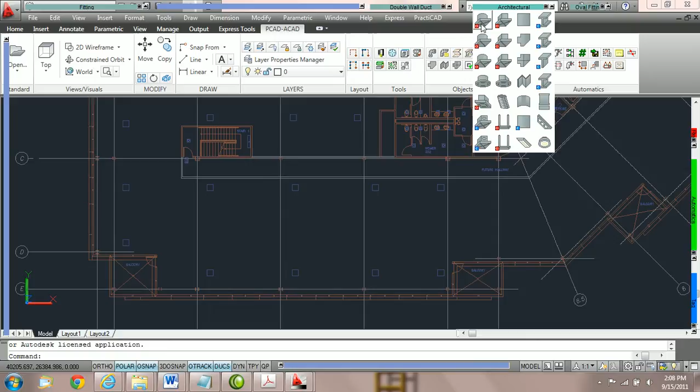We can go over to the parameter box, and right here, if you don't already have an airflow, let's give it a CFM of 200 and a model number ABC-123. We're going to say location room 1. And here you can also give it any special instructions, and you can also associate any accessories you have created for this grill as well. For right now, we're just going to type in the airflow, model number, and location.

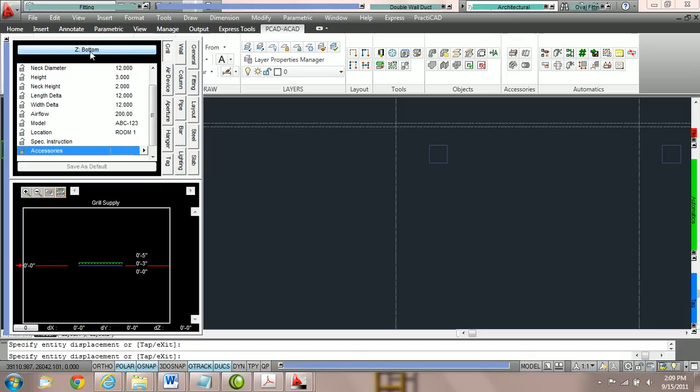Now, what we're going to do next is place the grill on the drawing first. And let's explain why. Inside PractiCAD currently, the hold positions we have are top, center, and bottom. Which means that when we look at our crosshairs, you can see that our crosshairs are actually holding the center of this grill. There are two ways to hold this grill by the corner. Either A, we can place it on the drawing first and copy it, which I believe is the preferred method. Or we could use our DX, DY, and DZ offset keys.

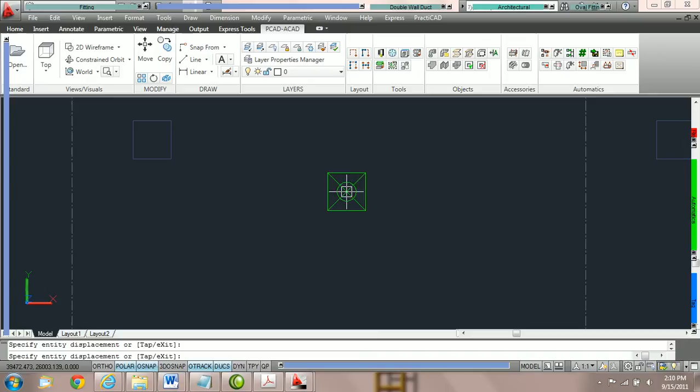For example, we know that the grill is 24 inches in face, so if we said offset X12, tab, Y12, which is half the distance, you can see I'm now holding the corner point. And there are tutorials on the DX, DY, DZ. But we're going to focus on what I believe is the easiest way to place down grills. I'm going to reset this DX, DY, DZ feature to 0, and now we're just going to place this down on the drawing at the height we want to place it.

So let's put the bottom of this grill at 10-foot bottom and hit enter. Then place it on your drawing. I click once, it's asking for a rotation. I click again, and now it's placed. Once you've got one on the drawing, click on it. You'll notice that PractiCAD's providing you with corner nodes, with which we can move and copy this grill.

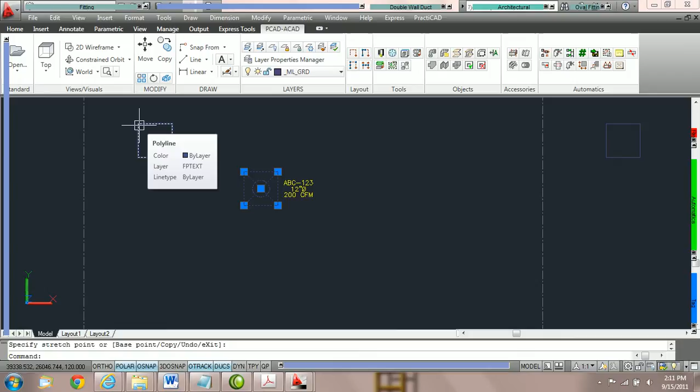But one thing we must be very careful about is we are going to take this grill and snap it to the background that was given to us by the engineer. And this background happens to have an elevation of 0, 0. You'll notice if you click on your grill that the elevation should be at bottom 10 foot. So if we don't use our Replace Z option, and there's tutorials on Replace Z, we're going to move and snap this to the background, and it's going to negate the elevation of 10 foot we have. So go into your automatic bin and click your Replace Z on automatic.

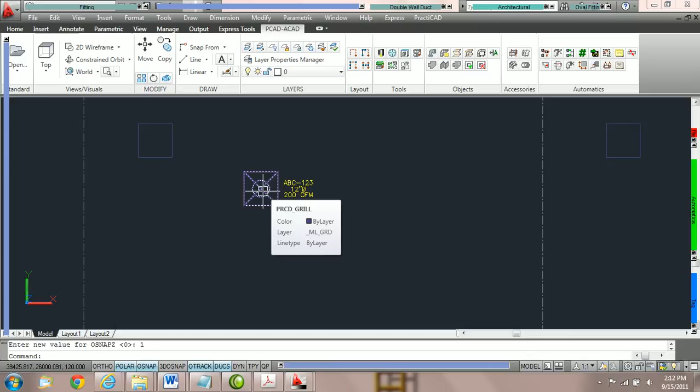If you're using AutoCAD MEP, you should have an icon for Z on in the bottom right hand side of your screen, about where my cursor is now. But in this exercise, we're going to click Z on. Once you do it, your command line should say enter new value for OSNAP-Z 01. That means that we've got Replace Z on. This means that no matter where we copy this grill, PractiCAD or AutoCAD are not going to change the elevation. So we want to copy this grill and paste it in all the different locations that it matches.

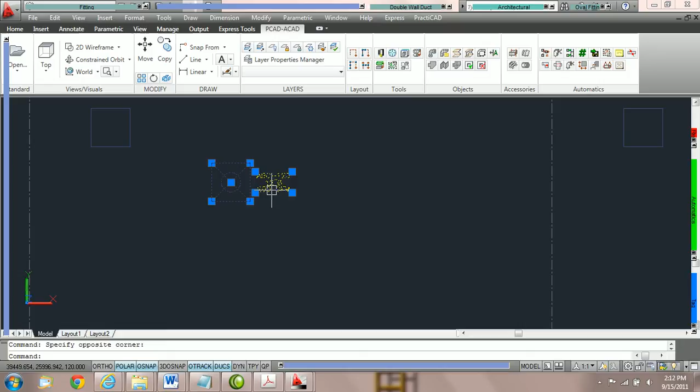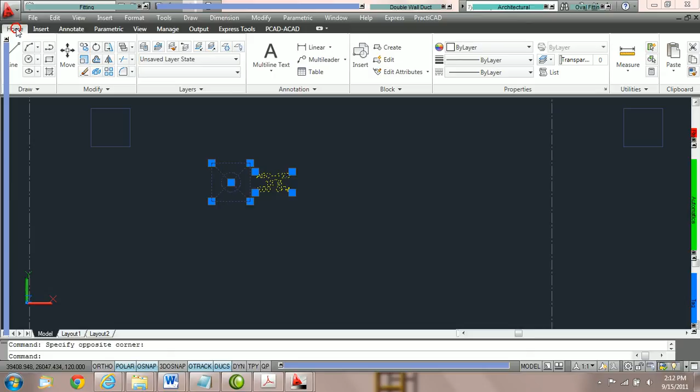Now make sure that you copy both the grill and the tag. If you don't do that, the tag you copy later will not be associated to the grill. And we can go over how you can make that mistake. But the proper procedure is always to copy the grill and the tag at the same time. And now let's use an AutoCAD copy command. My copy command is in the quick ribbon I've created. Yours could be under your standard home ribbon, and you should have a move and a copy command right here. So we can use copy.

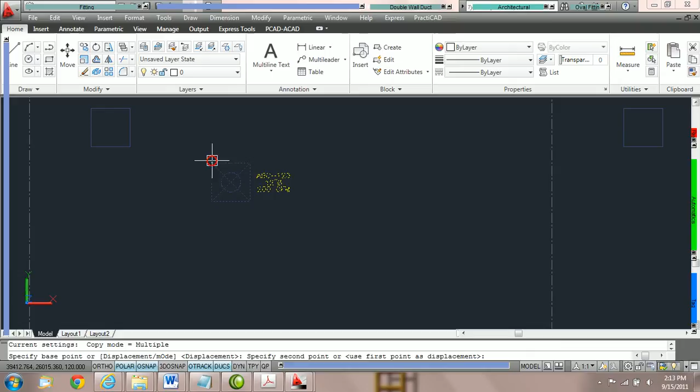Once we hit copy, AutoCAD's going to say specify base point or displacement, and we're going to pick the corner or the node we want to hold this by. We can use any point we want. We're going to pick the corner because we're going to snap this corner to corner. So we pick the corner, click once. Now we've got this entity held by the corner. And now all we need to do is click on every specific corner where we want to place the grill. So I'm going to place it on these 6 spots.

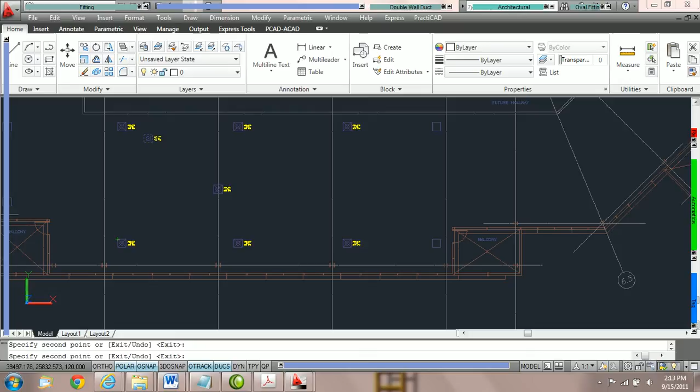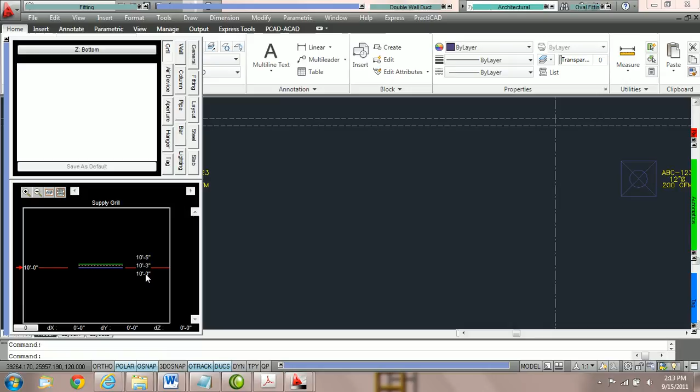Once we're done, we can hit escape, and then we're going to delete this grill. So you should currently have 6 grills on your drawing. And if you click on any one of these grills and go to the elevation box, it still should say bottom at 10 foot. That's an indicator that you did it correctly. You should also have the tags.

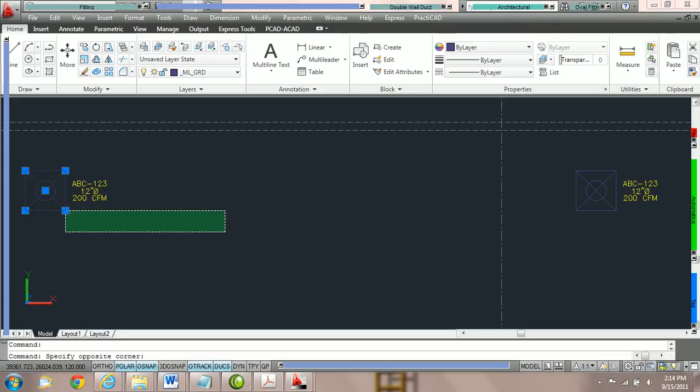Now, if you decide that you'd like to edit your grills later, all you need to do is click on the grill, right-click and go to AutoCAD Properties, or you can just double-click on the grill, as we'll do here, and your AutoCAD property box should open. And you can make any changes you want right here. For example, if we say that the neck diameter should be 16 and type it in, you'll see that the neck diameter has changed.

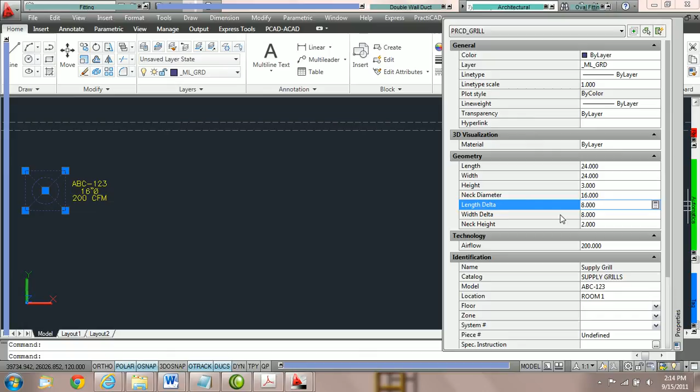You can also globally edit grills. What I mean is, since your grills are the same entity, you can actually edit more than one at a time. For example, click on one grill and then select a second grill. Then open up your AutoCAD property box and type in neck diameter 16 and hit enter. And you'll notice that PractiCAD will let you do this because they're the same entity.

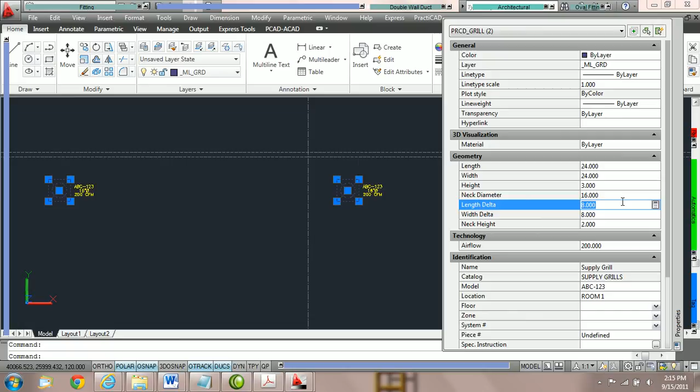So now PractiCAD's edited both. And your tags should update. Your tags might be different than the one in this tutorial, but your tag should always update to your change. So that's how to edit the grills. Now that'll conclude the tutorial on placing down grills. There's one more exercise that shows you how to move the elevation of grills all at once. There's a section on property automatics that allows for this. Please take a look at that exercise as well.